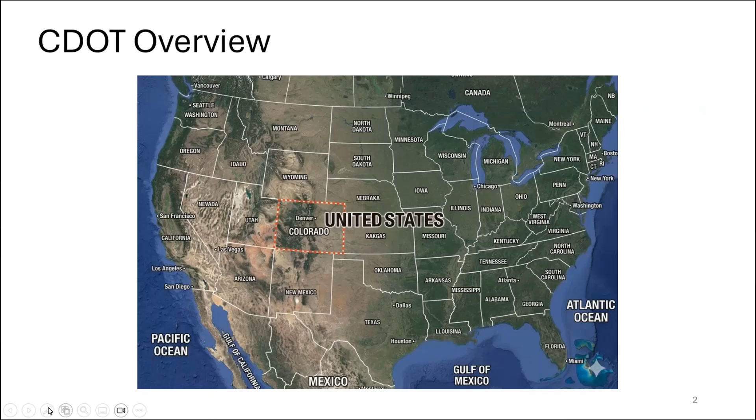Thanks, Kathy. A little overview on where our project is. We're in Colorado, which is in the western half of the United States, right at the heart, the Rocky Mountains. So an overview on the Colorado Department of Transportation. We have 8,600 bridges in Colorado. 3,500 of these are owned and maintained by CDOT. The rest are owned by local agencies or toll entities.

Now, the way that CDOT is organized, we have 5 different engineering regions, kind of one for each corner of the state, and then one in our metro area. And that's where headquarters sits. That's where our staff bridge department sits. And our staff bridge department is centralized. So we have a centralized office of bridge designers who support the regions in project delivery. So project delivery is decentralized.

And the project that we're going to be talking about today is actually in Region 3. It's highlighted by that yellow star. One of the areas kind of close to that is famous Lake City, Colorado. I got a picture here from a camping trip that I took last summer. So you can see it's a beautiful area of the state in our warmer months anyhow.

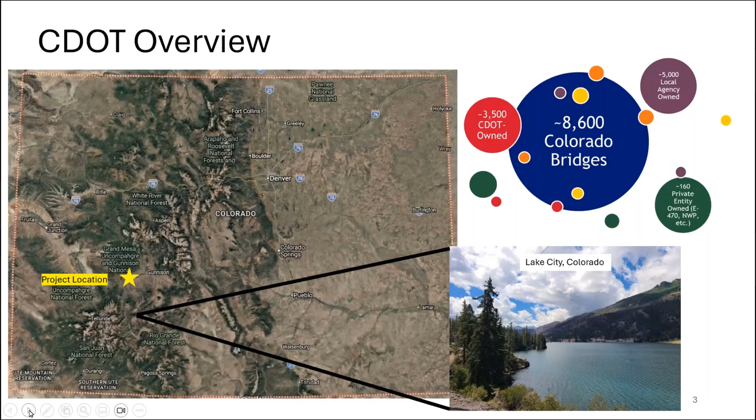Now, this specific project is located at Blue Mesa Reservoir, and it's in a very remote area of the state. So this is 3.5 to 4 hours from the metro areas of Colorado Springs or Denver. And you can see, and Keely will get into this a little bit more, but when we had to close these bridges, the detour around these structures was significant and really impacted the rural communities down there. So really high profile, important project.

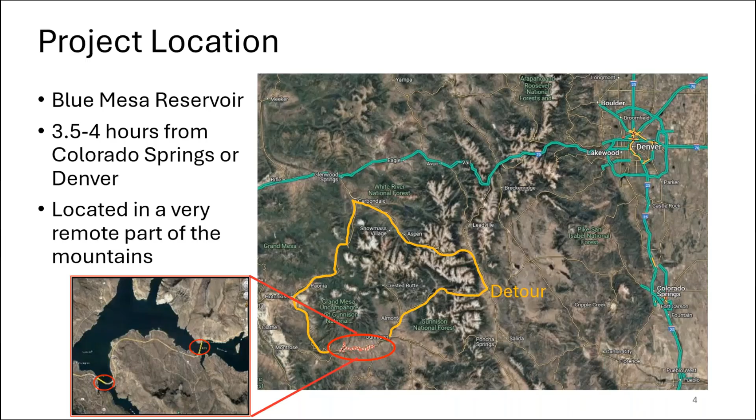Getting into our next slide and kind of the project delivery. So CDOT was on an emergency timeline to get these contracts stood up. So we went through the emergency contracting process and used CMGC delivery process. So we were lucky to get Michael Baker International on as our designer and Kiewit as our general contractor. And there were a lot of benefits to this method.

You know, we were able to get a better handle on material availability and pricing, risk identification throughout the project, schedule, constructability feedback from the contractor to our designers as we were working through things, plans and specs quality review as we're working through the process, and then being able to phase the work and get construction started as our designers were continuing to work.

So with that, Keely, I'm going to hand it over to you to hop into the details. Thanks, Natasha. So now that we know a little more about where our location is, I'll tell you a little bit about these bridges in particular.

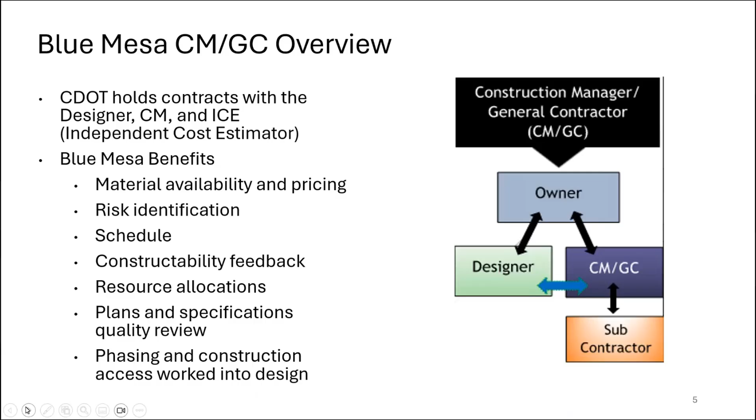So we were primarily looking at two bridges, K-07-A and K-07-B, also known as the Lake Fork Bridge and the Middle Bridge along this route, US 50. Both bridges were built in 1963. Before this project, they were in fair condition. Their main spans for both structures were continuous plate girders, a two-girder system over 3 spans, and then with approach spans. So A had 6 spans total, and Bridge B had 10 spans.

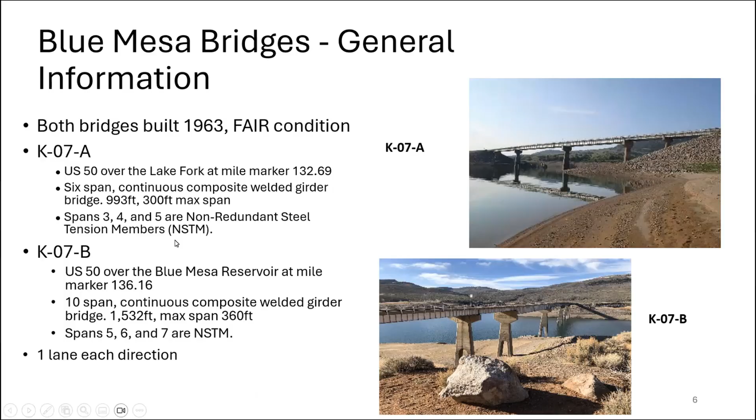They carry 2 lanes, 1 in each direction on both structures over the Blue Mesa Reservoir, which you'll see throughout the project. So why were we out here? The main reason that CDOT was looking at these structures was because of the memo that FHWA issued in 2021 in response to several other high-profile bridge closures related to this type of steel. So Hernando de Soto, Sherman Minton.

After that, they issued a memo requiring each state to identify which bridges had this material on it, to test that material and any welds that were in it, and then to mitigate or repair any defects that they found in the T1 steel welds on these structures in non-redundant steel tension members, or fracture critical members at the time. Colorado had identified the 2 Blue Mesa bridges as their only 2 bridges having this T1 steel with welds in Colorado, with these non-redundant steel tension members.

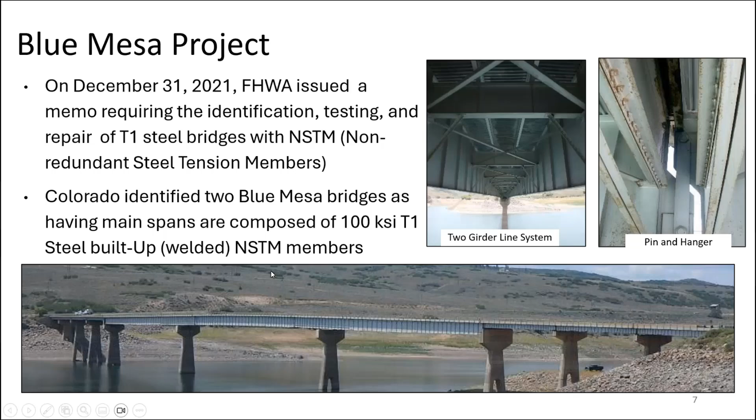So they were out there identifying where welds were located in April of 2024, and that was the start of this project. So what is T1 steel? What do we mean when we say that? On this project, it is a high-strength steel that was developed in the 1950s. It was used heavily throughout the 1950s through the 80s. On this particular project, our ASTM designation was A514 for the pieces that were T1 steel.

There were actually other types of steel on the bridge as well, but the one we were primarily concerned about was this T1 steel, and the reason we were concerned about it is the fracture potential of those welded joints. So T1 is a marketing name that was used by US Steel during this time frame for this high-strength steel, and it has known weldability issues, primarily due to hydrogen cracking, that cause concern for these structures.

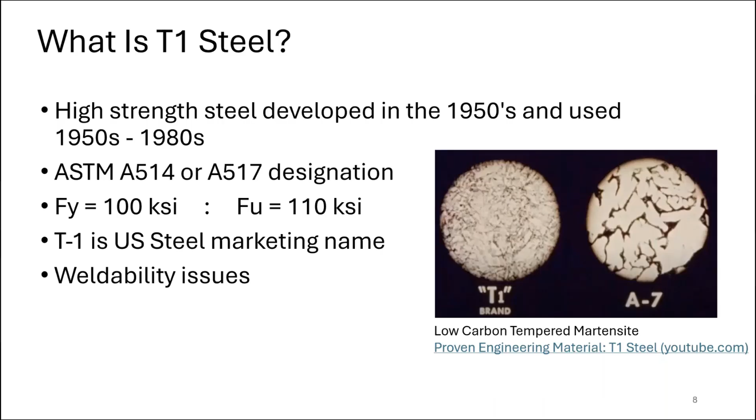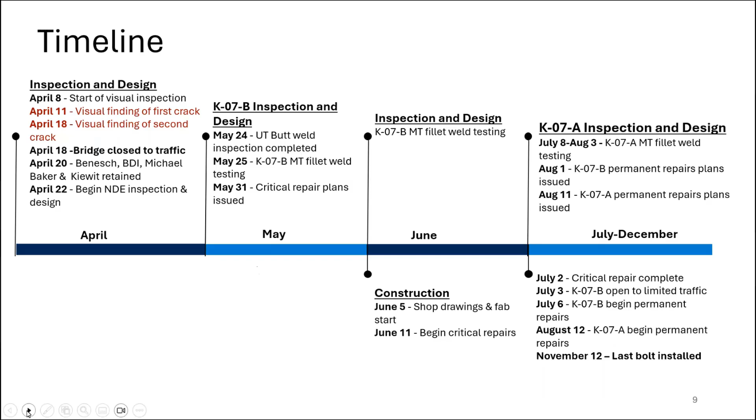So an overview of the timeline for this project. I'll get into some of the details on the other slides, but as an overview, the general start of the project was in April when they identified the crack. The bridge was reopened to traffic on July 3rd after some critical repairs, and then the construction finished up in November '24. I'll get into some details on each of these phases of the project.

So initially in April, CDOT and their consultant for inspection were out identifying what welds were actually in the T1 steel material. There were some discrepancies between the as-built and the shop drawings and what was actually observed in the field, so they were trying to identify where these locations were. The inspector from one of the consultants was out on the bridge and observed this crack, as shown in this picture right here, circled in red.

This is what they saw as they were out there identifying the welds adjacent to this weld. When they removed some of the paint, they saw that this was in fact in the weld material. This was only on one girder initially on the 11th. They closed traffic on the one side of the bridge and detoured it to the other side, continued their visual inspection to find the other weld locations, and during that, on April 18th, observed a crack in the adjacent girder, so with a 2-girder system, in both girders in the same cantilevered section here in the middle between the pin and hangers.

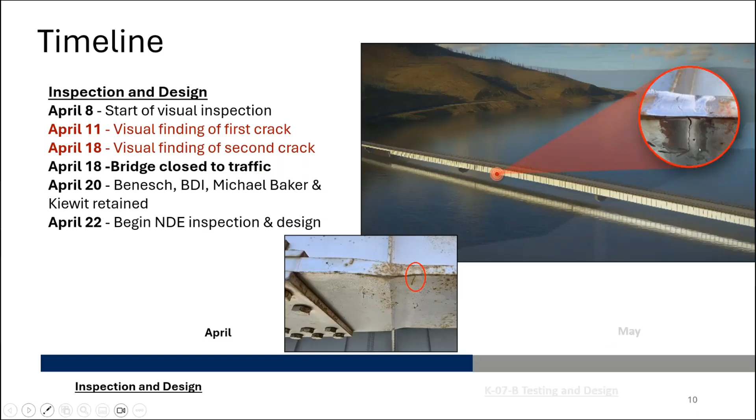At that point, the bridge was closed to traffic, and they started looking for a CMGC designer and contractor. And by April 20th, Michael Baker, Kiewit, as well as Benesch and BDI to perform some of the testing and inspection were all under contract and began working with CDOT to reopen the structure. On April 22nd, we began the UT of these butt welds in earnest. So after the initiation of the project, testing really began.

This particular site posed a lot of problems to even identify what other cracks may be present in this bridge before we could get it reopened safely to the public. One of the biggest constraints we have is because the T1 steel issue that they were concerned about is a fracture problem, any cracking would have been sudden, and they did not want to have any kind of safety issue on the bridge. So establishing what equipment and how much equipment could be on the bridge was really important and did slow down the process because we had to find equipment that was under the weight restrictions we had on the bridge, which was basically an inspection vehicle that had crossed the bridge the day it was closed.

So we used finite element modeling to identify what the stresses were in the bridge from that vehicle crossing, and then kept all of our inspection equipment underneath those stresses at any given point. So access became a really big issue. Additionally, April in this mountainous region is still part of the winter season. We're still getting quite a bit of wind and weather, and that did restrict the amount of time that our inspectors could be out removing paint or identifying butt weld indications. So it did take us until May 24th to get complete inspection of all the butt welds on Bridge B.

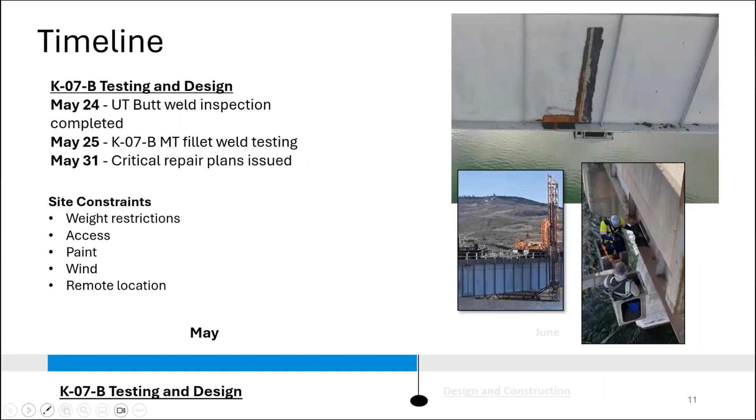Throughout that month, we were actually designing individual repairs for any indications we found and doing additional testing. As we started to get to the end of this month, paint removal at a couple of these butt weld locations revealed some individual fillet welds cracking between the flange and the web. And that kind of started some new investigation and changed some of our design ultimately. The critical bridge repair plans to fix only surface breaking cracks so that we could reopen to some limited traffic were completed roughly 1 week after the testing was complete, and fabrication and construction started on those critical elements. Next, we moved into design of the permanent repair and construction of those critical repairs.

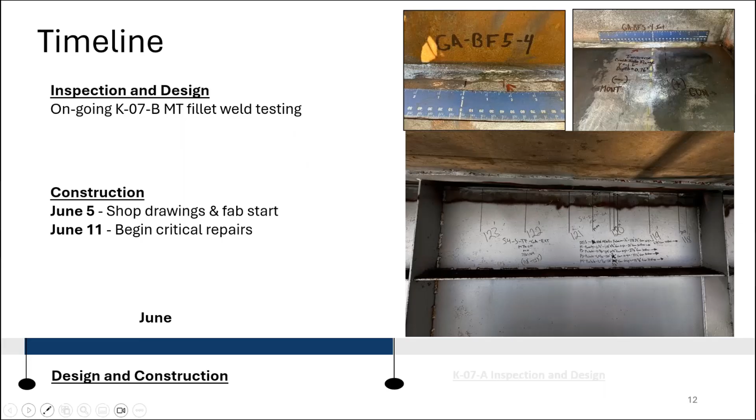So at this point, as I stated, we started seeing these little transverse cracks in the fillet. This is the web here, and this is the flange. So we started seeing the same hydrogen cracking, transverse cracks along that fillet weld. As we removed more and more paint, it became clear that this was prevalent. So you can see these black lines in this picture. All of those are transverse cracks in the fillet weld. And that really changed how we were going about the repair and whether a global or local solution was necessary. By July, the critical repairs, which I'll talk a little bit more about in the next few slides, were installed, and the bridge was reopened to local traffic by the July 4th holiday.

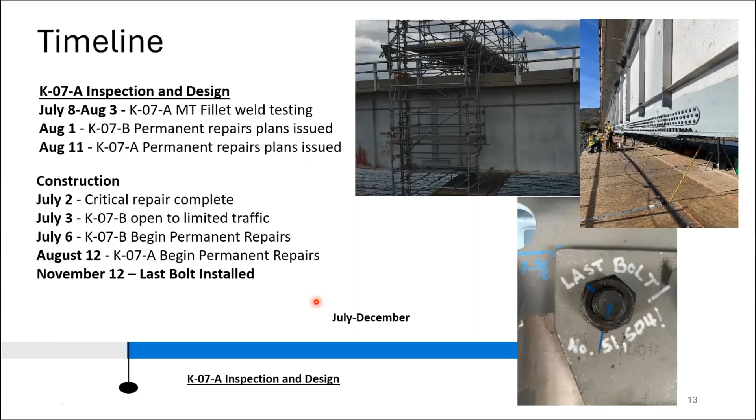Throughout all of this time, we were also looking at what that permanent solution could be. After they opened the bridge to limited traffic, they started working on the permanent repairs. Those plans were already in the works, and they had gotten an early package to fabricate the steel plates. So the RFC package was issued on August 1st, and they began permanent repair even before that with some of the early packages that they could complete. All of this was completed by November 12th before the snowplows needed to be on the bridges for the winter season.

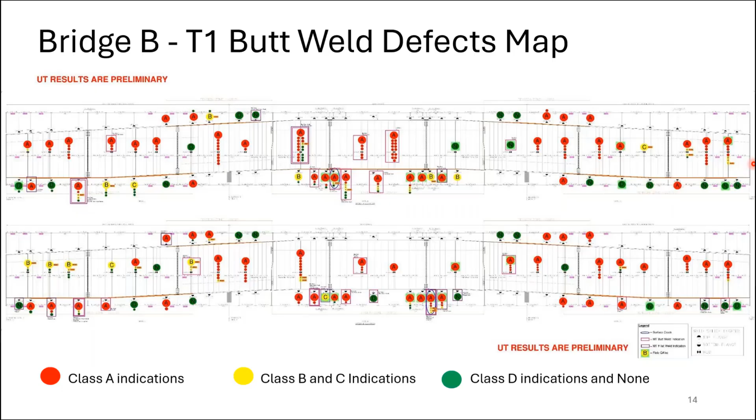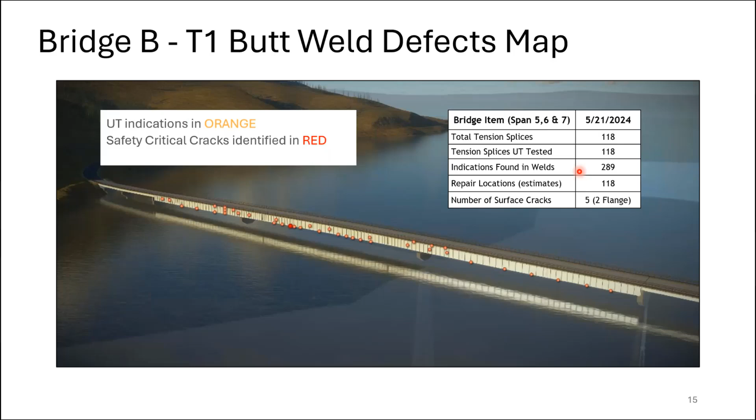The other cracks, because hydrogen cracking happened shortly after fabrication, it was determined that these indications had been there from the beginning of the bridge, and that it could safely handle local traffic once these surface breaking indications were addressed. So the critical repairs were addressing these 2 cracks on the 2 girders in the cantilevered span and the hanging span between the 2 pin and hangers. And they were designed to fabricate, install, and reopen the structure as quickly as possible. So they were really designed for speed.

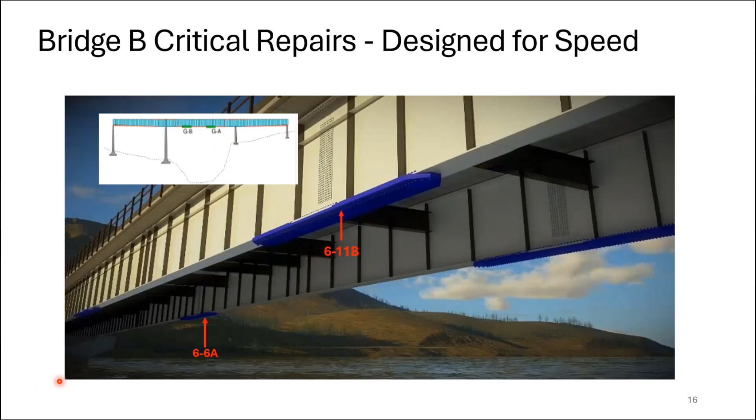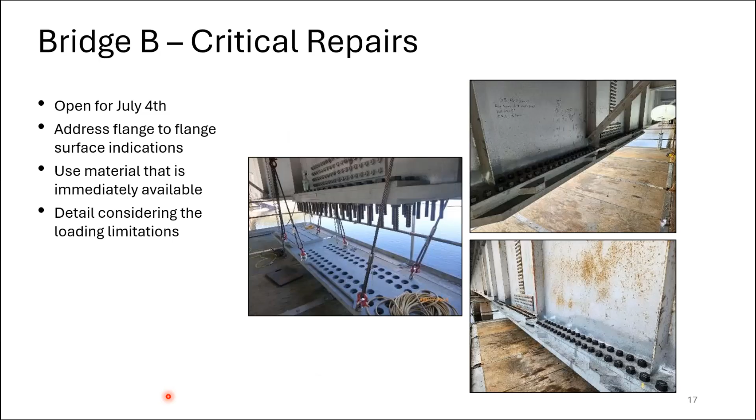So here are some pictures of what those plates look like. We worked with the contractor to integrate our hold points and to work with the existing field splice to switch out the bolts. It again was only to address the surface indications, and this was the main goal, to get the bridge open to local traffic by July 4th. We used 50 KSI material on this section because it was readily available to the fabricator. They could get it in April and start fabricating those plates right away. We were also limited with how wide we could go by what bolts we could get, not only their grade, but also the length of bolt we could reasonably procure during this time frame. And all of this had to be detailed in close coordination and collaboration with the contractor in order to consider those load limitations on the bridge.

Again, as I said, at this point is when we started finding a lot of this web flange fillet weld cracking. And Francisco will talk more about the solution, but that really changed the direction of where our permanent repairs were going. The substructures were load limited. There were some load reasons that we couldn't add additional load to the substructure units as well. So we were trying initially to keep these local to minimize any increase in loading on the structure. With that 50 KSI material, it's so thick to get it to basically have the same capacity as the 100 KSI steel that we were running into some problems. But as we started seeing these fillet weld cracks as well, we kind of switched directions, that really moved the goalpost, and we had to go in a different direction towards more global plating solutions.

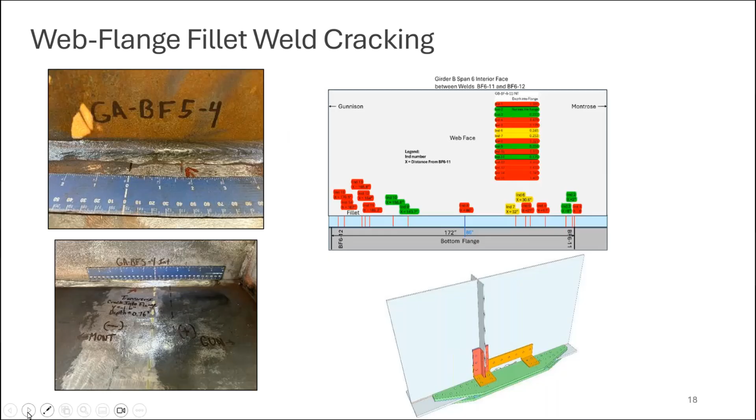At this point, however, we did catch a lucky break, and AVCO was able to find 100 KSI material. So they were able to basically do some special rollings or add to their rollings that they were doing for other industries to get us 100 KSI material in 3/4 inch and 1 inch plates. So this was really a game changer and allowed us to consider global solutions that would also address these fillet weld cracks without having to identify all the locations, which was very time consuming because of the paint and the length of this bridge, and allowed us to minimize any impact to the substructures.

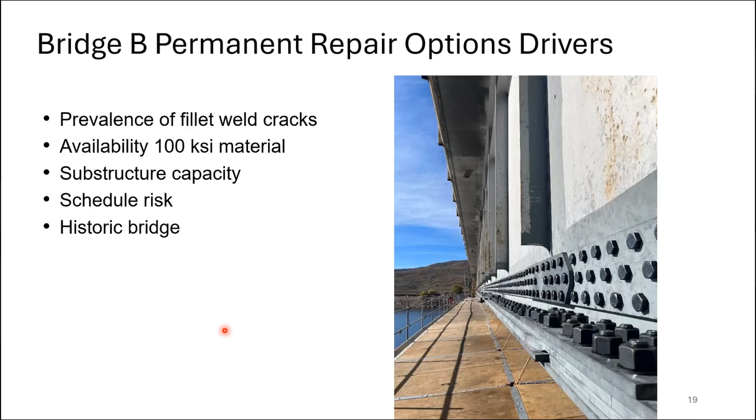It also allowed us to minimize the visual impact because this was a historically eligible bridge, and that was important to the community, that you couldn't see these repairs from the shores, which is much easier to do with these smaller plates. So here's a general view of the permanent repairs that were developed throughout this project.

So we had top flange plating because we did not want to open up the entire top flange section and have a large portion of open deck during the permanent construction that would have to close the bridge. We actually went with local repairs in the top flange sections and tested the fillet weld for the entire length in order to make sure that we didn't have any of those flange to fillet or the fillet weld cracking. These were 50 KSI so that they could start working on them immediately, and then required a small deck removal in order to get those bolts in.

We had a web butt weld repair plate. So this basically addressed any indications that were in that full height weld between sections. We had the web to fillet weld crack arrest plate, which Francisco will get into some details, and then some continuous bottom flange plating in all the tension areas in the 3 main spans.

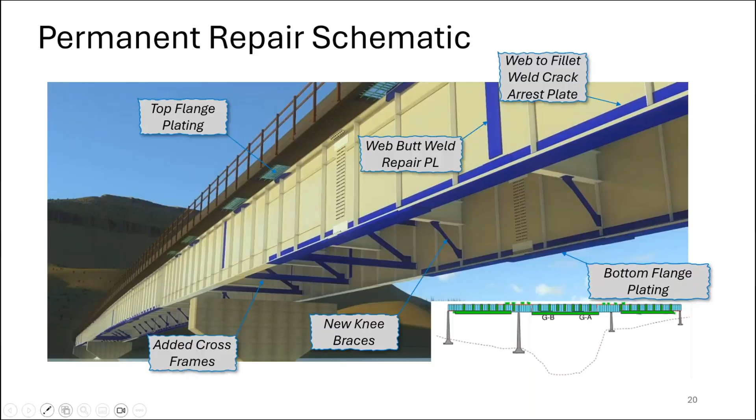Additionally, we had to do some other work in order to get more construction loads out on the bridge. We added a couple cross frames to address some lateral torsional buckling issues that kept construction equipment off the bridge, and we had some new knee braces in order to accommodate some of our plates. With that, I have a couple quick construction photos to show you, just to give you a sense of the scale of some of these repairs.

So some of them did end up being larger in the top flange, where we did have a lot of fillet weld cracking. So you can see a larger section. This is one of our local repairs. And as I said, those were 50 KSI and were designed to try to minimize our deck removal and the duration of the impact to traffic.

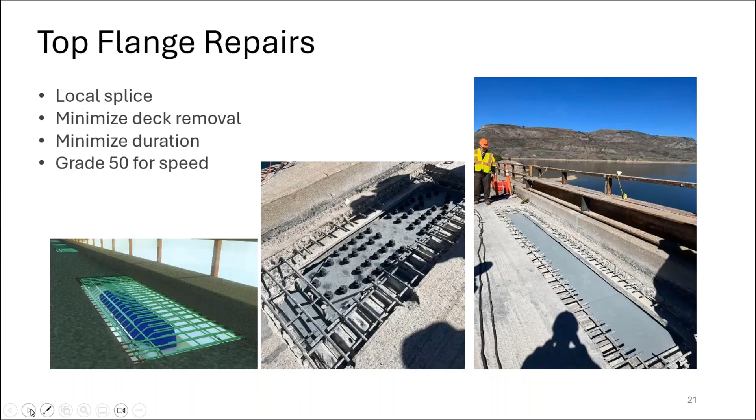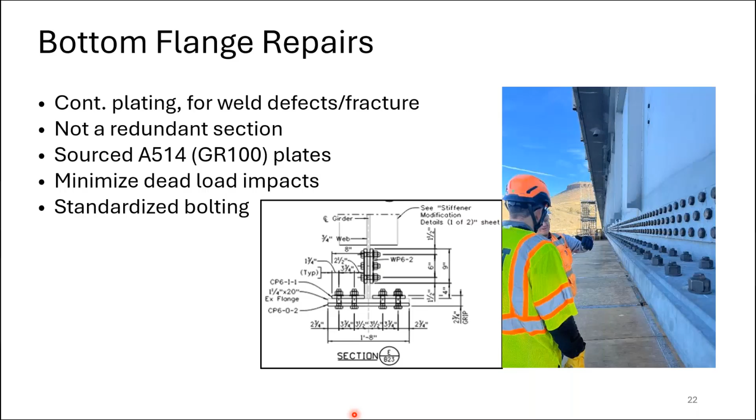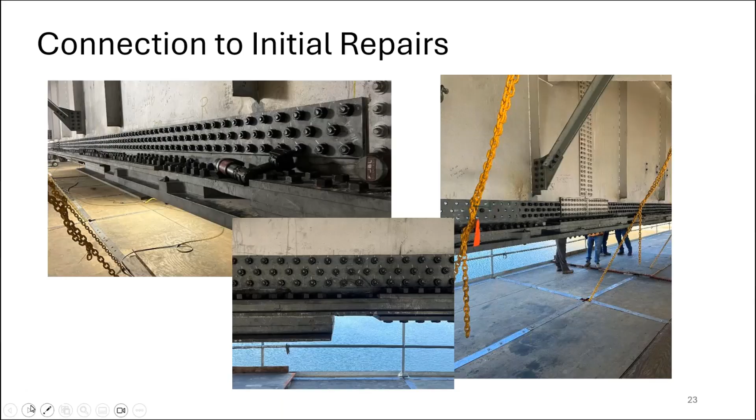And this is a good comparison of what the difference between that material really meant to this bridge. This is the critical repairs that were done with 50 KSI steel. And then on this side, we have the permanent repairs that were done with the 100 KSI steel. So we were able to remove quite a bit of weight from the structure. And with that, I will turn it over to Francisco to get into the details of the web crack arrest plate. So, well, thank you, Keely.

And before I continue, I was going to talk about the development of one of the repairs, but I had to present a little bit of the characters in the game here. When we were working this at Michael Baker, we reached out to Professor Connor at the S-BRITE Center. Back then, I was also working for Baker. Now I'm working at Purdue University. The S-BRITE Center is the Steel Bridge Research, Inspection, Training, and Engineering Center at Purdue University, which is a center that is funded through DOTs, and basically there are DOTs that are members. There's 24 of them, plus the Federal Highway Administration.

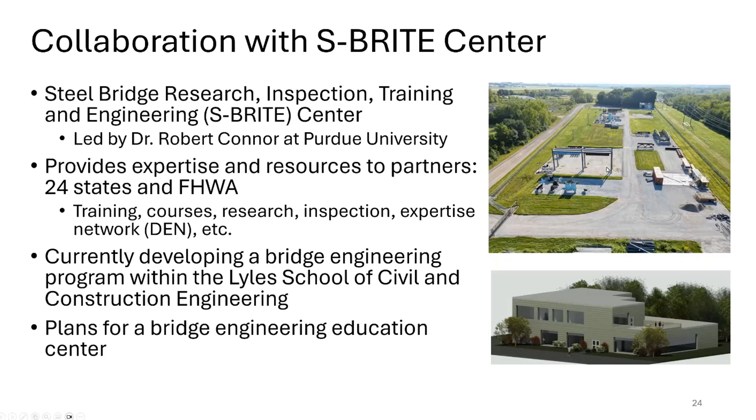And the objective of this center is to provide resources and expertise, and especially get involved in some of these problems that are a little bit more complex. Also, in this center right now, we are currently developing the bridge engineering program at Purdue University. We're also planning on developing a bridge engineering education center, a facility within the S-BRITE Center facility that you see there in that image. Those are things that are coming. But anyway, going back to the main topic, as Keely brought up, the issue stems from the embrittlement issues that occur in T1 steel.

And one of the problems that we encountered was that in the web to flange fillet welds, we have defect indications throughout the length of the girders. So the extent of these indications made traditional repairs kind of unfeasible, and this added to the concern that this was an NSTM member, or a non-redundant steel tension member, which used to be known as fracture critical member. The concern is basically that if you were to get a full fracture in the member, a full section fracture, that might lead to collapse of the structure.

And this led to the development of a repair that was a continuous retrofit that had to be effective regardless of the actual location of the crack or any hypothetical location. So when we encounter this kind of web to flange weld issues, the typical approaches are either based on coring methods or the installation of dog bone details.

So you would typically use a coring method as shown in this picture here, when you have already detected a crack extending from these web to flange indications, and then you core out the tip. By that, you reduce the stress intensity that occurs at the crack tip, and therefore you now have a blunt crack that doesn't grow. If you don't know the location of the crack, you typically do a dog bone detail that is basically two coring holes joined by a slit with the intention of intersecting the crack as it propagates.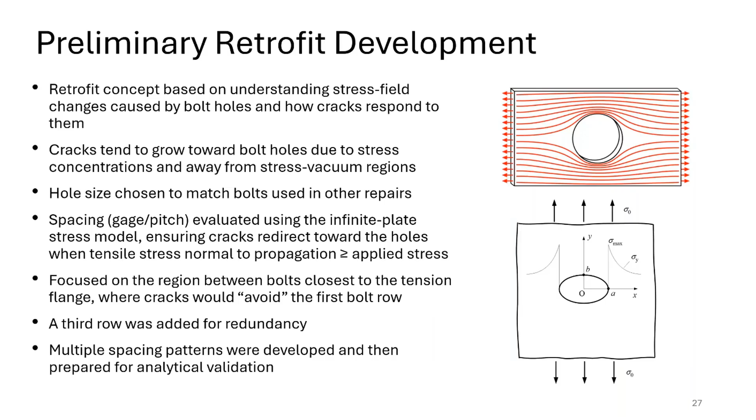In addition to that, it has a crack propagation scheme so that if you meet a certain criteria, the crack propagates. So we sent a series of bolt patterns to Dr. Korkmaz and Dr. Connor at Purdue University, and they provided validation using the extended finite element method. Basically what we found is that the majority of the cracks tended to end in the first row of bolts, with only some extending into the second one and none going into the third one. During this evaluation, they used different crack propagation criteria with different energy release rates and different mode 1 to mode 2 propagation ratios as well, to try to consider all fracture propagation conditions possible.

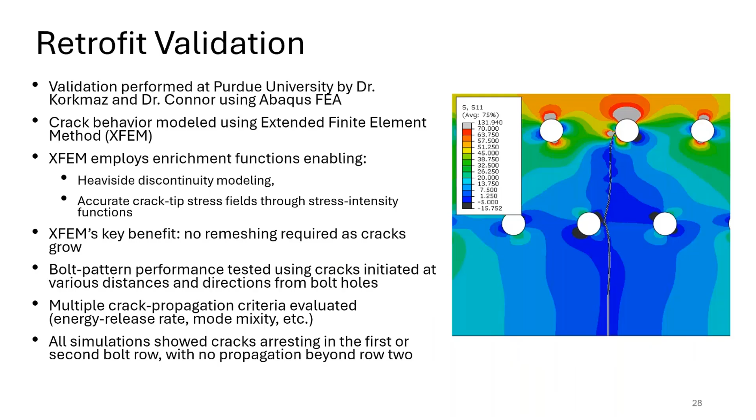And finally, once we had the bolt pattern that we wanted to implement, the last thing was to provide a series of modifications so that this retrofit is compatible with the other retrofits already in the structure. As I said before, the final retrofit is 3 bolt rows with a defined minimum and maximum spacing limit, and web reinforcement plates placed on each side in order to maintain capacity of the web if a crack was to emanate from the web to flange and propagate into the web.

The retrofit also required compatibility with other retrofits, particularly where we already have a cored web crack location, where maybe we have to interrupt the spacing and implement a dog bone detail, or near existing flange splice retrofits where we have pad welds in the web itself. In those cases, where we couldn't maintain the spacing of the bolt pattern, we came in with an additional dog bone crack arrest detail. This adjustment allowed us to provide consistent crack arrest performance across the structure, and through the entire section of the girder that has the web to flange weld subjected to tension, we have provided a retrofit that will be able to prevent any crack propagation from a web to flange weldment into the web.

I think I'm done presenting. I'm gonna turn it back to Keeling.

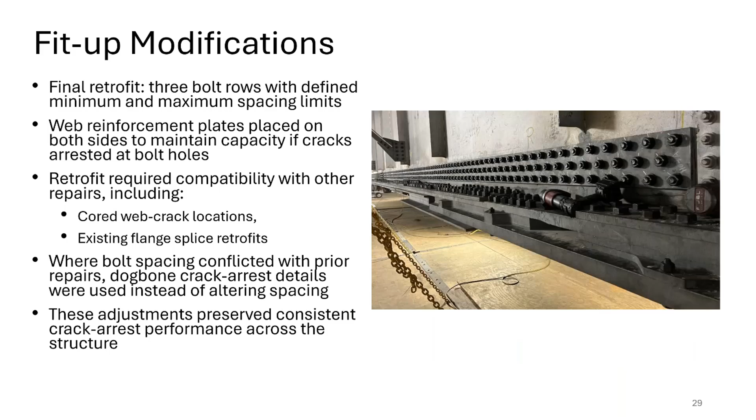Thanks, Francisco. Next, I just had some wrap up information and some lessons learned from this particular project. This was just to give you, again, a sense of the scale of this project. We had over 118 splices that were tested on Bridge B. As I said, there were over 289 indications found between the 2 structures.

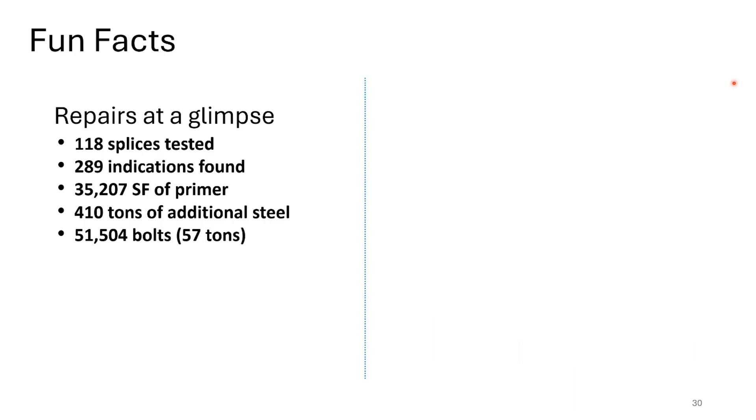The length, the depth of these girders, and the design at the time in the 60s was to change the plate sizes as often as you could to save material. And so there were quite a bit of these repairs that were needed. And so you can see that in the 35,000 square feet of primer that was put onto the bridge, 410 tons of additional steel between all the plating and 51,504 bolts, which equated to over 57 tons of just bolts on the structure.

I also wanted to take a minute to thank all of our partners. There were a lot of people, as you could see with the length of this detour. It was important to get resources out on the structure, not only for design, but for construction, inspection, CM management. So there were a lot of different companies and people involved. Special thanks, of course, to CDOT Region 3 and Staff Bridge, as well as Gunnison County. There were some local detour routes that were actually improved in order to get small traffic through the area and keep these communities connected. There were people taking kids to school across on boats.

So there were a lot of people that really came together and supported this, as well as our inspection and testing through Benesch and Bridge Diagnostics. Of course, Rob Connor and the S-BRITE Center, as Francisco noted. FHWA, the coating specialists and paint removers were very important on this particular job. There was high chromium in the paint, and so it did require specialized equipment to take the paint off the structure, as well as our construction manager, Stantec, and all of their subs that they had out on the structure all summer of 2024. And then, of course, special recognition to AFCO for finding that material that really made this solution possible.

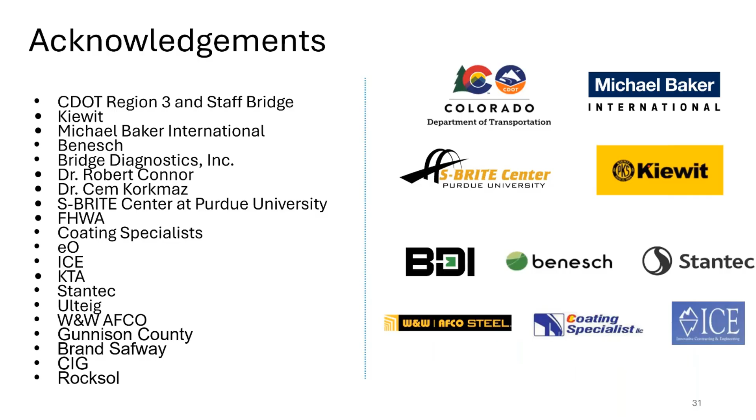A few of the lessons learned: really the story of Blue Mesa is a story of collaboration. Everyone wanted to get this bridge open, talked and collaborated, came up with solutions. And that really allowed us to come up with a solution that worked best for this bridge and got it open quickly. There were also some unique challenges on this structure compared to other T1 steel structures that have been repaired that can be taken forward, and why the Plinko plate, the crack arrest plate, was really necessary on this bridge. One of the big reasons is that this was a girder bridge. So we are working with bending, the tension is changing throughout the web and throughout the length of the structure. Whereas a lot of the T1 steel that had to be repaired was in truss members, so tension-only members. So it offered some unique challenges that we can take forward into other projects.

On Bridge A, our lessons learned from trying to remove the paint from the extent of the weld defects on the bridge: CDOT actually elected to forego testing on Bridge A, and we just went with a solution where we plated every single weld in tension on Bridge A, and that allowed us to get everything completed by the end of 2024 by foregoing that testing.

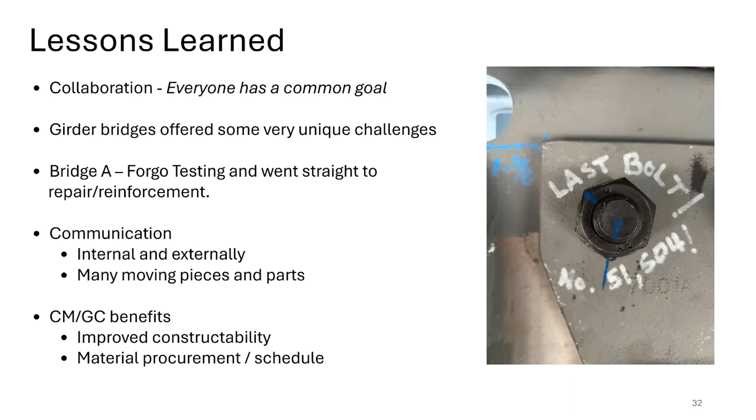And then, of course, with any CMGC, the importance of communication, both internally and externally. So with the contractor, the client, the designer, inspectors, but also with the community, so that we could have their buy-in to the solution. And then that improved constructability and the benefits of CMGC on our emergency project really shone on this particular project. Finding the right materials and minimizing rework in our design by finding out what the contractor could actually get, and then working backwards to a solution that worked for the structure. With that, we can take any questions.

So we're going to turn it back to Paul Lyles, Kathy Kroll, and Bijan to moderate the question and answer period. Okay, so the first question is, if the bridge was constructed in 1963, then what ASTM or actual specification covered 100 KSI steel? I believe everything on this bridge was ASTM A514, that was T1 steel. There was also a 440 steel on the structure, but all of this was basically before the fracture control plan welding requirements of 1978. So that was really the main issue. It wasn't necessarily the material, it was the welding procedure, and how we do that now was not in place at that time. Good answer, thank you.

The second question is, what was the design load versus the design capacity of the weld?

I think the question is regarding the design capacity of the weld versus the load. We don't believe that there were any sort of design issues in the original design of the structure, that any of the welds were undersized or such. The issues were, as we were saying, related to hydrogen cracking and embrittlement on the weld. And those happen a little bit after; in this type of steel, T1 steel, it's an issue.